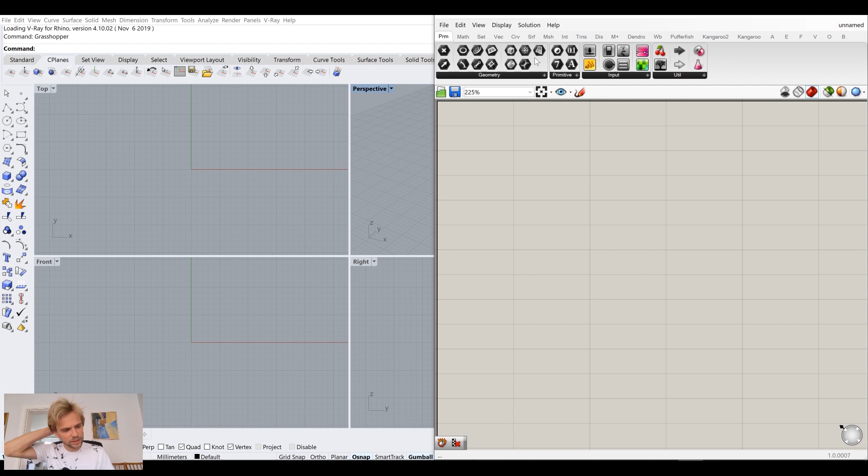So the way smocking works is basically you have a piece of fabric and you stitch some parts of it together to create this kind of a pattern. And actually, let me Google that for you. Smocking patterns. There we go. Images. Yeah, stuff like this, right? And it's not necessarily this pattern, but just this kind of a planar pattern.

But rather, I'm going to try and do something a little bit more three-dimensional. So we'll try and create a column out of it. And the person who's doing research, at least in the field of architecture, is Annie. There we go. She's working as I believe still a PhD candidate in LTH in Stockholm, and she's doing some really interesting stuff. So if you're interested to learn more about the subject, just Google her, find her papers, and you can read all about it.

But basically, we'll just try to do something really simple and really fast. So enough of that. Where do we begin? Well, let's first find a smocking pattern that we can use. I think this is from Annie as well. So she's using fabric as a formwork for concrete, and I think that's a brilliant idea. A smocked fabric to create these beautiful patterns on a concrete shell. Let's go with the middle one, right?

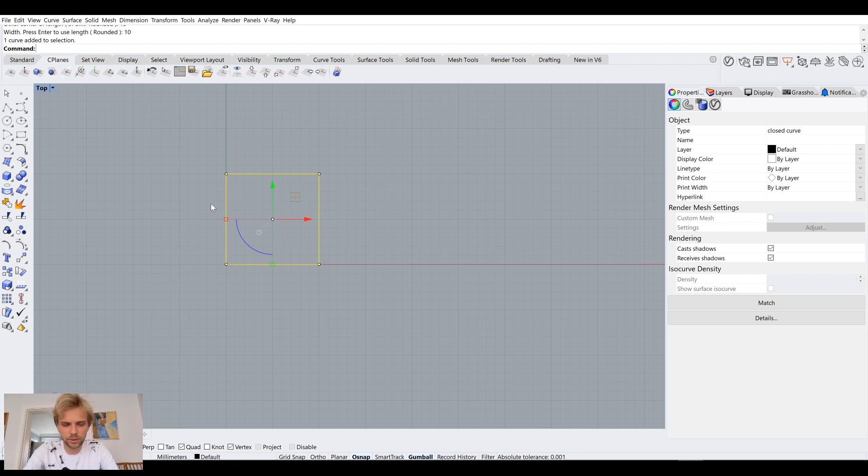I could use array, but for this I'll just copy. Why not? Copy. Let's do it like this. Copy. Great. So we have 8 rectangles, and I'll just call this layer pattern base, and I'll move all of those objects to that layer. And then what do we call this layer? Lines. I'll just call it lines, and I'll make it red. There we go.

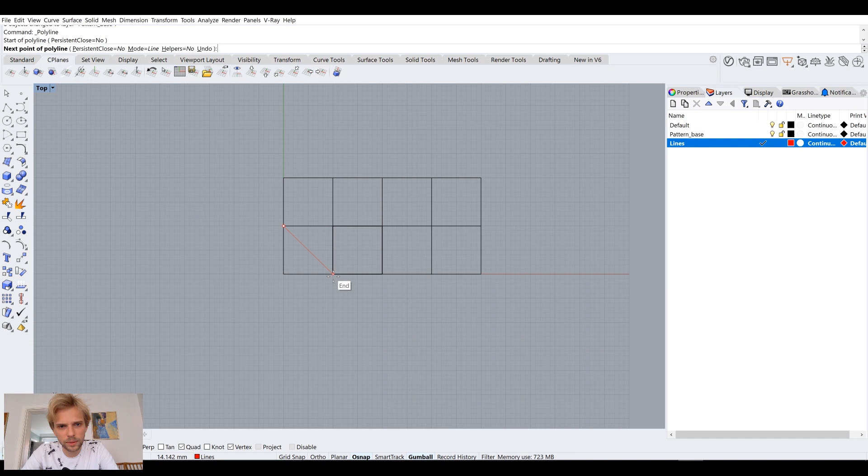And in this layer, we will draw these line segments here. Okay, so we have one going down here, and these can't be polylines, these need to be separate line segments. So stuff like that, and then we have this, and we have that. Okay, so we have this very simple pattern. And now it's time to convert it into a mesh and start messing around with it in Grasshopper.

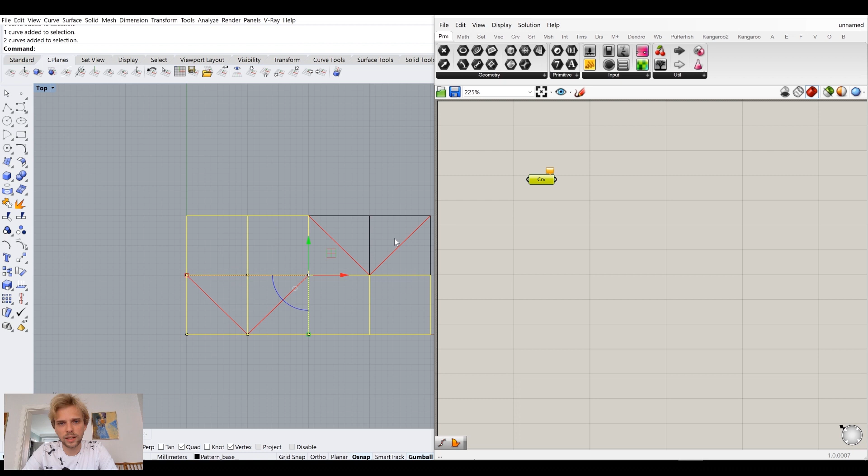Okay, so first things first, let me reference these rectangles into a curve component. So I'll select these 8 rectangles. I'm not selecting the lines, by the way. And I'll right click on the curve component and set multiple curves. There we go. Maybe I should hide them. Or no, it doesn't matter. And then we have these line segments. So I'll make another curve component, and I will select these line segments. Right click, set multiple curves.

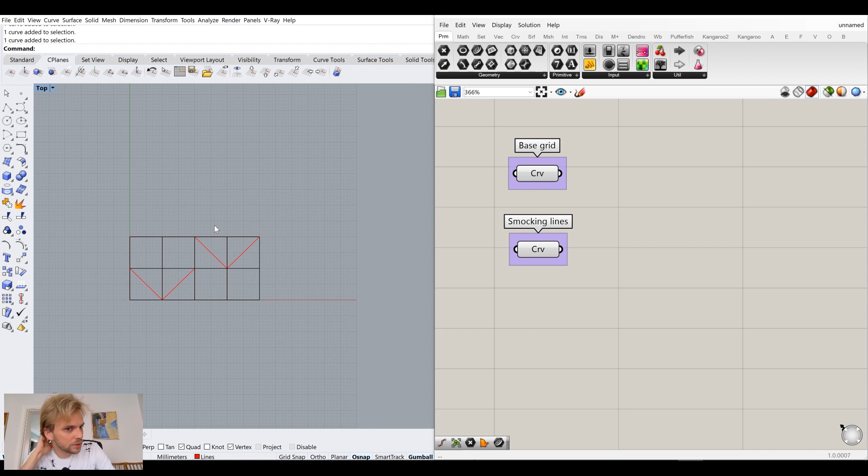Actually, I'll group these components separately, and I'll call this base grid, and I'll call this smocking lines. Okay, so now we need to be able to array this to any size that we want, right? So we want to be able to keep arraying this over and over. So how do we do that? Well, first things first, base grid here, I want to make this into a mesh.

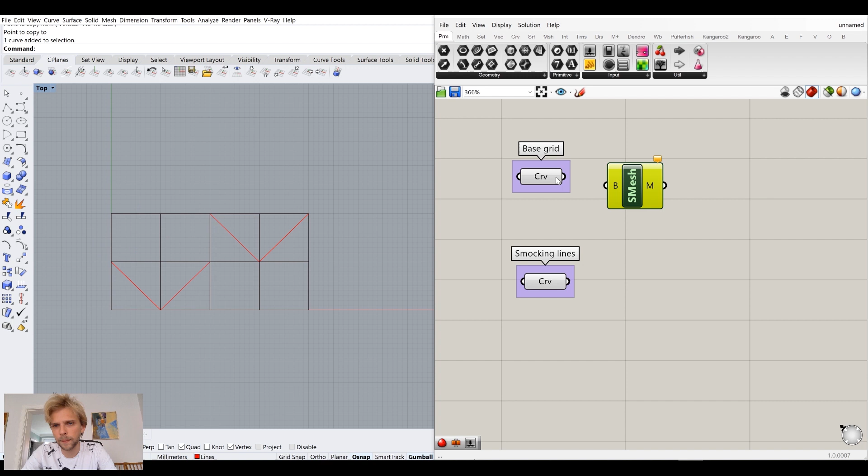Because I don't want to deal with curves anymore here in Grasshopper, I'll make this into a mesh. The easiest way to do it is by using a tool node called Simple Mesh, which will recognize every rectangle as a mesh face, so as a single mesh polygon.

So what we get here is 8 separate meshes, which have 4 vertices and 1 face. That's good. I will use those 8 meshes with Combine and Clean, which comes with Kangaroo 2. And now we have one single cleaned up mesh.

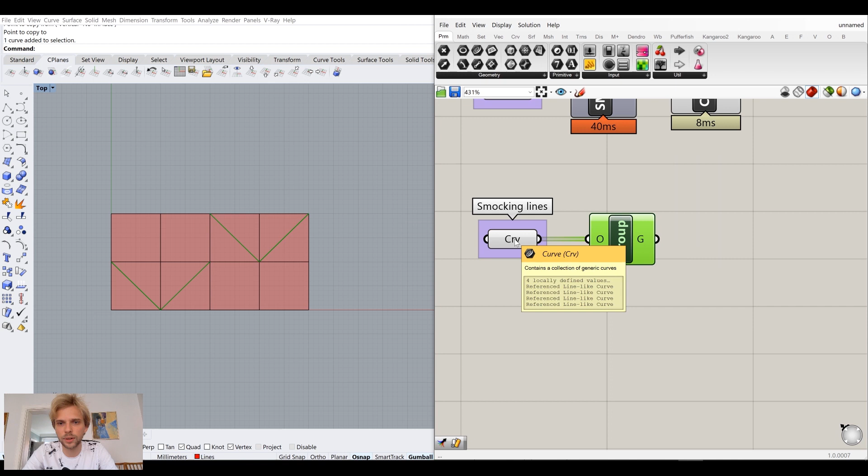Okay, that's good. And now for the curves, I want them to be arrayed as a group. So I'll just use a group component here, package these 4 curves into a single object, which is a group in Grasshopper. I will merge these 2 together into one list. So if I look at what this list has, it has a mesh, and it has a group with 4 objects. Easy. Those 4 objects are, of course, these curves here, these lines.

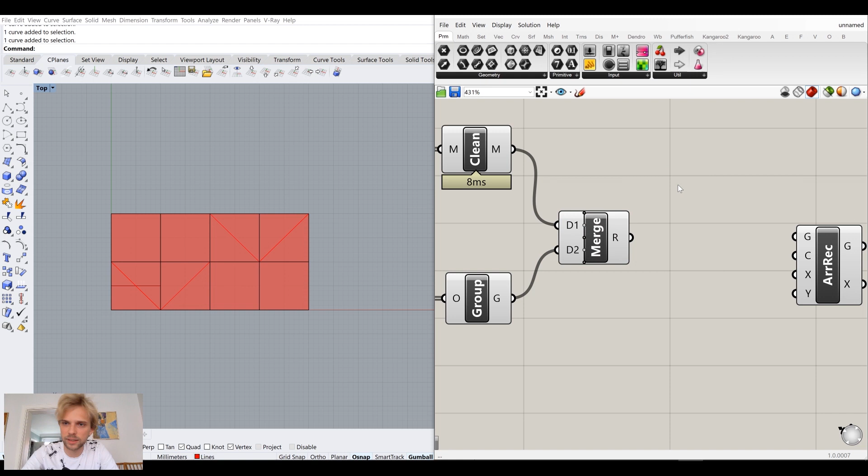Okay, so now it's time to array. Let's use just a regular rectangular array. And the geometry that we're arraying is going to be... no, sorry. Before we array, I want to group this again, package this even further. I'll group these 2, the mesh and group of 4 objects, into one single group.

So you can think of it as me just packaging everything into these boxes, just a big cluster of things here. Let me keep hiding things so that nothing is in the way. And now let's array. Okay, we have it arrayed, but the size, of course, is very bad.

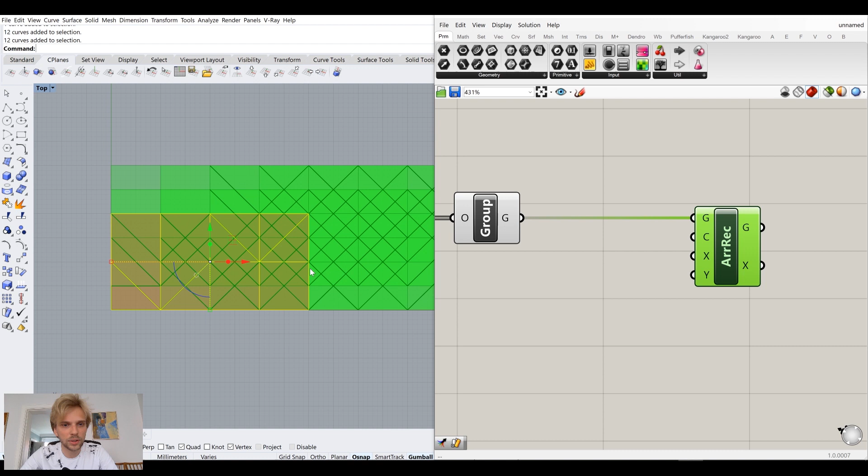The step size of the array is calculated through a rectangular cell size, so we need a rectangle that is like a boundary rectangle for all of our geometry that we have so far. To do that, let's just use bounding box. And what it gives us as an output is a flat box, meaning it's basically a rectangle.

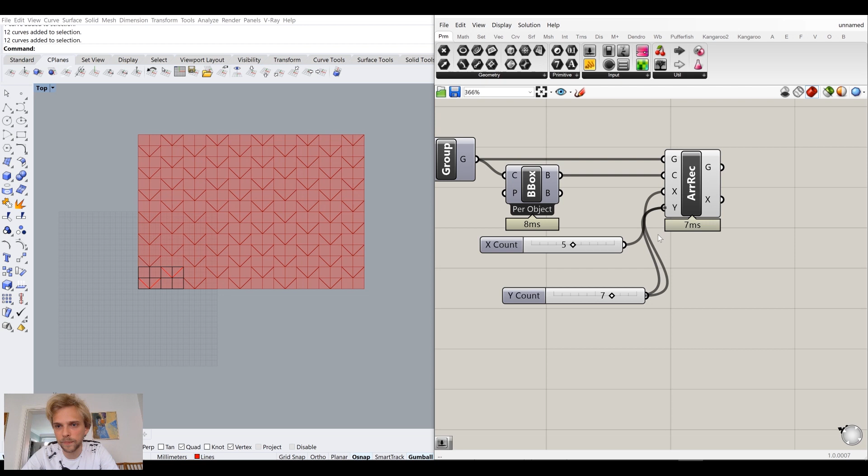So we can just use that as a cell, and now it's going to array properly. So now we have full control over how many times do we repeat this. I think I'm going to repeat it 5 times in X and 7 times in Y. Maybe let's go for 5 and 5, and then we'll switch it up if we don't like it. But basically here we can just control how many do we have.

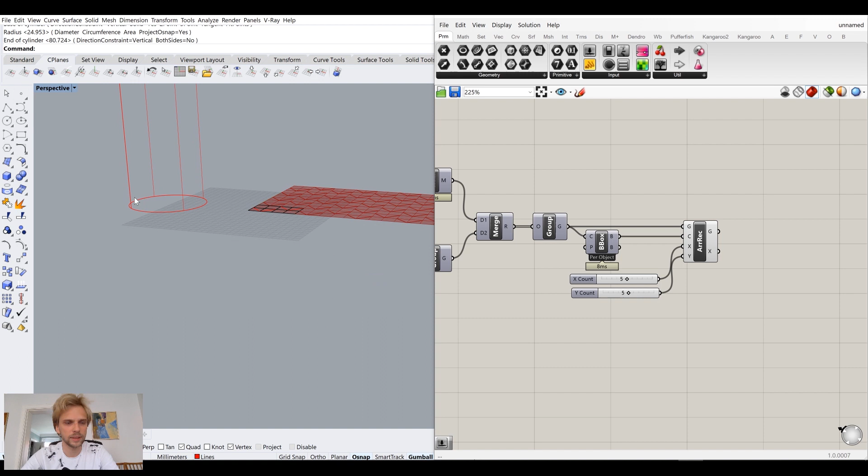Okay, so for now everything is flat, and as I mentioned before in the video, we want it to be a column, so it doesn't really work since it's flat. But what we can do is we can make a cylinder here. Let me just make it here, a cylinder, something like that. I'm not too concerned about the size of the cylinder. Actually, maybe I want it to be a little bit taller though.

Okay, and I will explode the cylinder and just get rid of the top and the bottom here, so it's basically just a tube. The nice thing about this is it's a single surface, meaning we can map this flat pattern onto the surface. So by using this technique, you can map the flat pattern on any kind of untrimmed single surface.

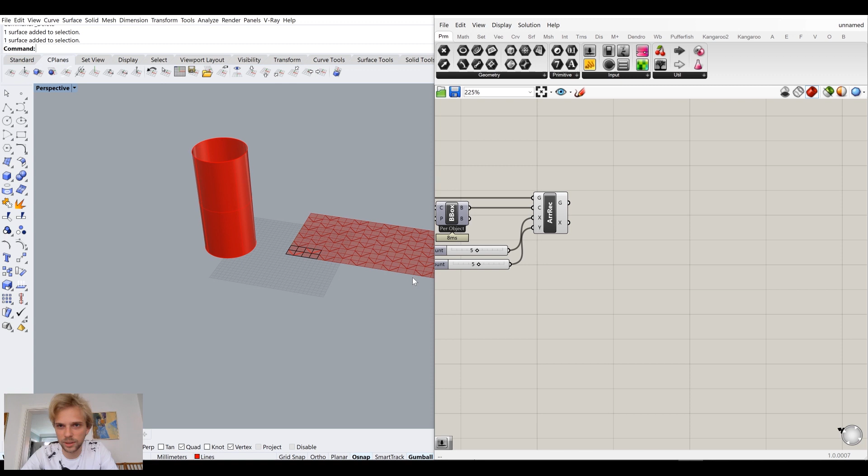But in this case, I'm just using a cylinder, we don't need to go all fancy with this. In Rhino, the tool that does that is called flow along surface, but in Grasshopper it's actually something else. It's under translation, or under transform, morph, and I believe it's called sporp. I don't know what's up with the name of it, but yeah, sporp. So it has a lot of inputs, but those are very easy to work with.

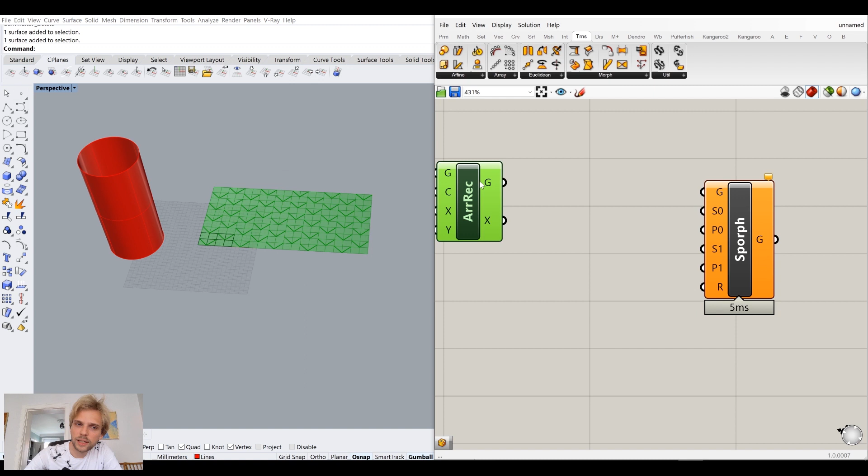So first input is base geometry, meaning what are you going to map. It's going to be all of our stuff here, so I'm just going to take all of our groups here, 25 groups in total, and those arrayed groups are going to be transferred from a flat piece to a cylindrical piece, or a flat surface to a cylindrical surface.

Then it asks me for base surface. Well, we don't have one yet, but as you can probably tell from this tool right here, we can just keep on using the bounding box tool. As long as it's flat, it's going to just give us a surface. So I'll say bounding box.

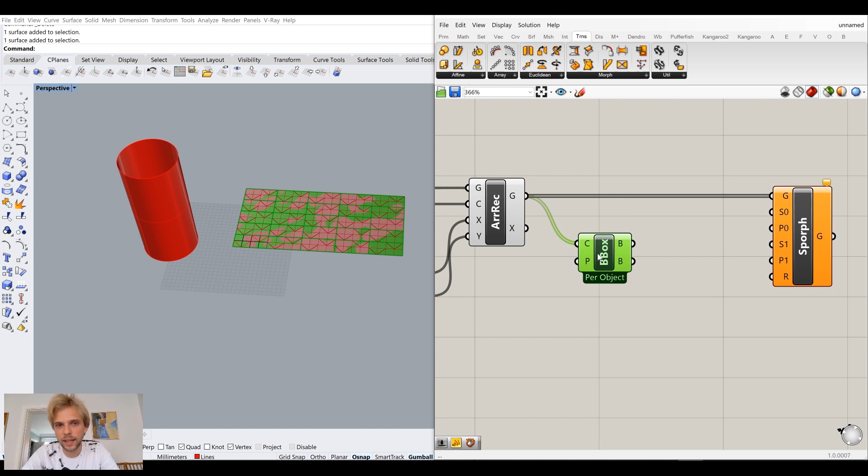Keep in mind that when you use a bounding box on this arrayed geometry, since it's per object, it's going to give you 25 bounding boxes. So I need to right click on the bounding box tool and choose union box, and then it's going to give me only one bounding box for all of them.

And it's a flat box, so I don't think it's going to work just like that. I'm not sure, but just to be sure that it works, we can use deconstruct brep, and it gives us one face, which is an untrimmed surface, and we just connect it to the S0 input here as our base surface.

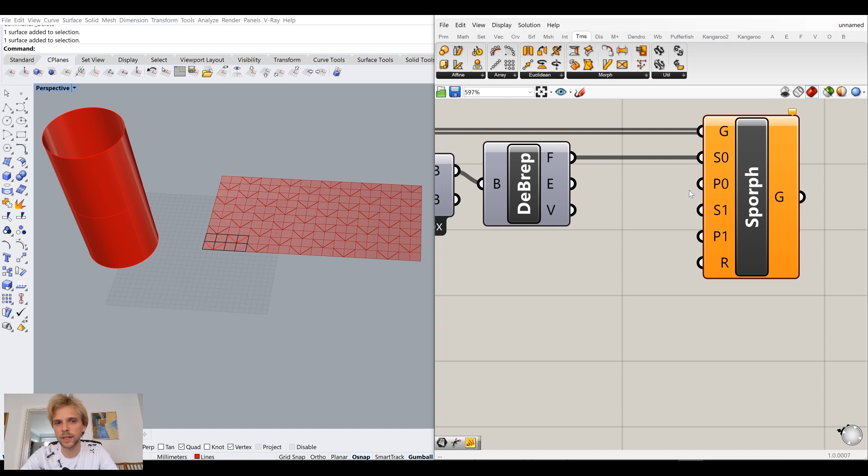Okay, so we're morphing this pattern from this surface, and then it asks us for UV parameter for orientation. Actually we don't really care about this, so we'll just use the first point on the surface, UV at 0,0, as well as UV at 0,0 for this cylindrical surface. I'll create a panel, double click on it, and type in 0,0. That means it's going to be the bottom left corner of this surface.

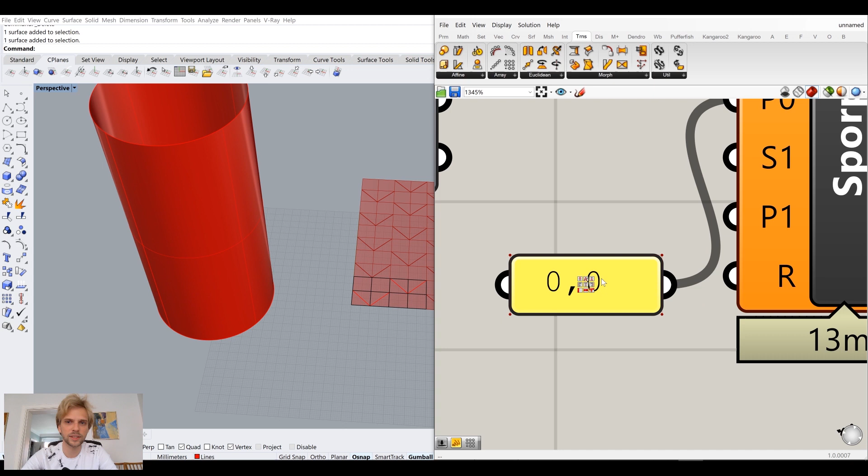By the way, with the panel, don't hit enter because that's just going to create another line of text. Just click outside once you're done. You don't want to have more than one line of text.

Okay, so we have the first part of this setup, and then the second part is the target surface. So that's going to be our cylinder. Let me reference it in as an SRF surface, set one surface, and let me hide the cylinder. And then UV parameter on target surface - I'll just reuse the same panel, why not.

Rigid geometry will not be deformed as it's transformed. I need to think about this. For now, let's keep it as false, but if this doesn't work, we will know what's the culprit.

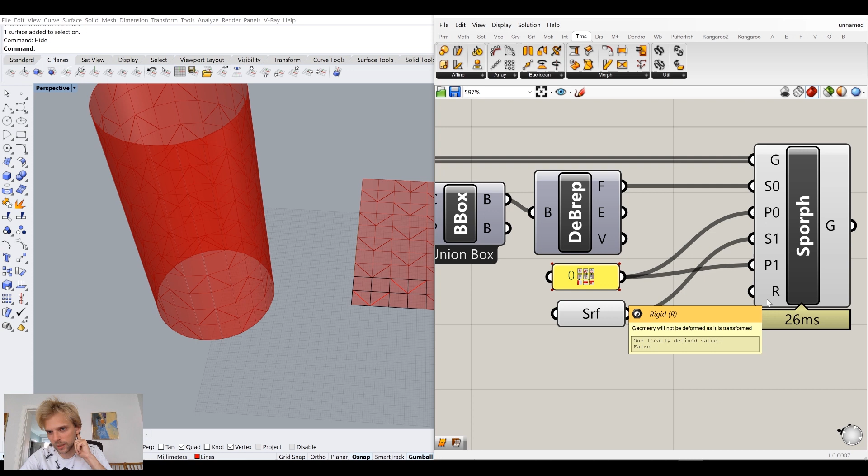Okay, so what do we have here? Well, we have a bunch of groups, right? So everything seems to be working correctly. Nice, and let me hide that so that it's not in the way, and now we'll just continue working with this guy.

So here we have 25 groups that are wrapping around this cylinder, and I will use ungroup on them. So I have ungrouped them, and now we have 25 branches. Let me right click on the output and choose simplify to kind of simplify the tree. So we have 25 branches from those 25 groups, and in each branch we have 2 elements.

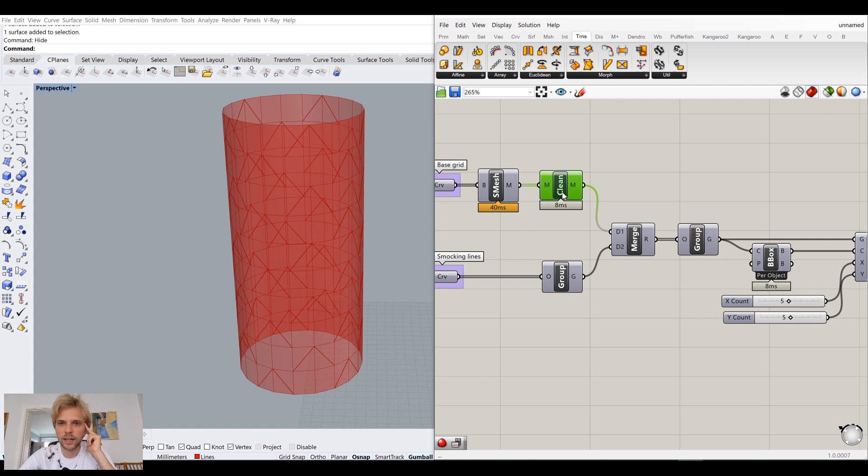And those elements are the meshes and the lines. So let me separate them by using explode tree, like that. We need to do one more thing.

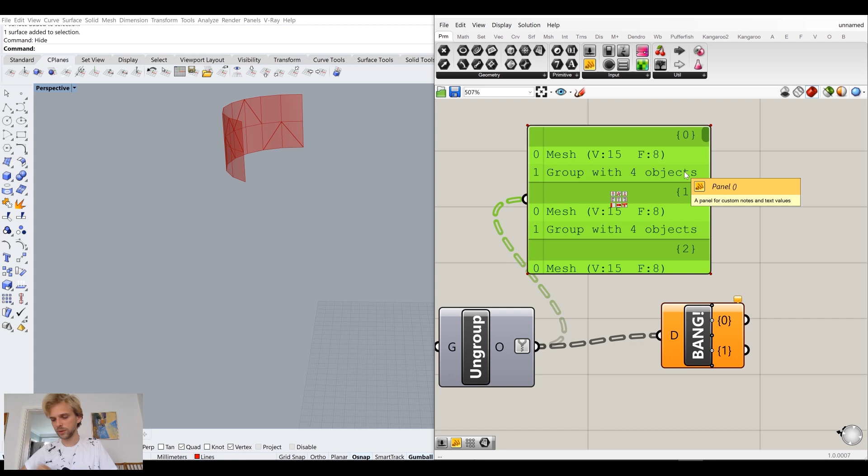So if I look at it with a panel, I can see I have 25 branches with always the first element being the mesh and the second element being the group of lines that are going to contract. That's good and all, but I want to separate all meshes and all groups into separate outputs.

So to do that, I can say flip matrix, and what this will do is take all of the meshes that are at index 0 in each branch, and group them all into a new branch. And then it's going to take all of the groups that are in index 1 in each branch, and group them into their own branch.

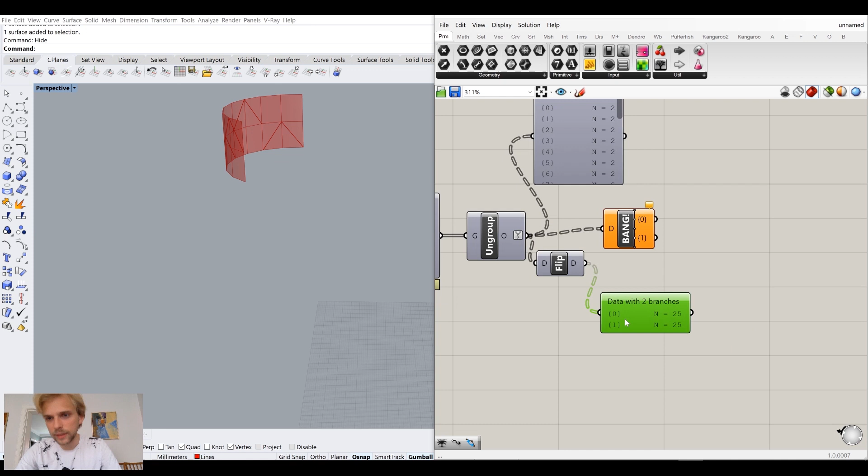So visually, I guess it's easier to show you. Visually we had a data tree with 25 branches and 2 elements in each branch. After flip matrix, we have 2 branches with 25 elements in each branch. So it kind of flipped the logic.

And now I can use explode - I can use bang right here. And now we have separated all of the meshes into one output and all of the groups of lines into another output.

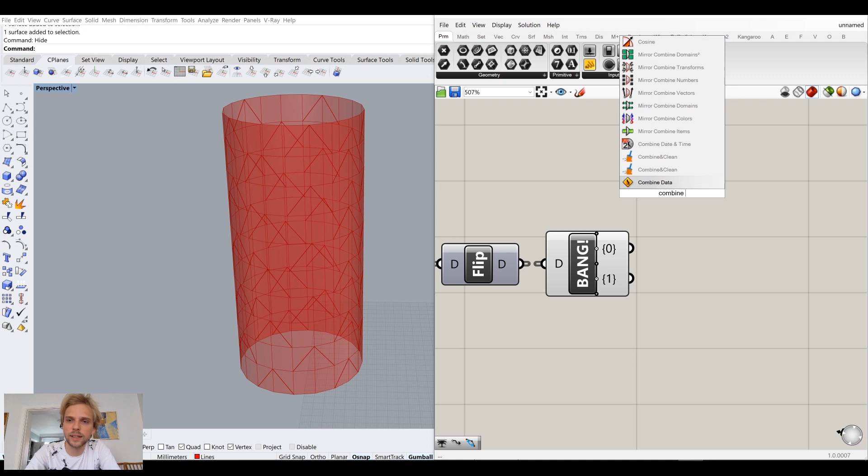All right, so now let's deal with the meshes first. I want to join them up, and I'll use combine and clean for this.

So all of the meshes are joined up now, and I need more resolution. I can't use Catmull-Clark subdivision for this, and let me explain why.

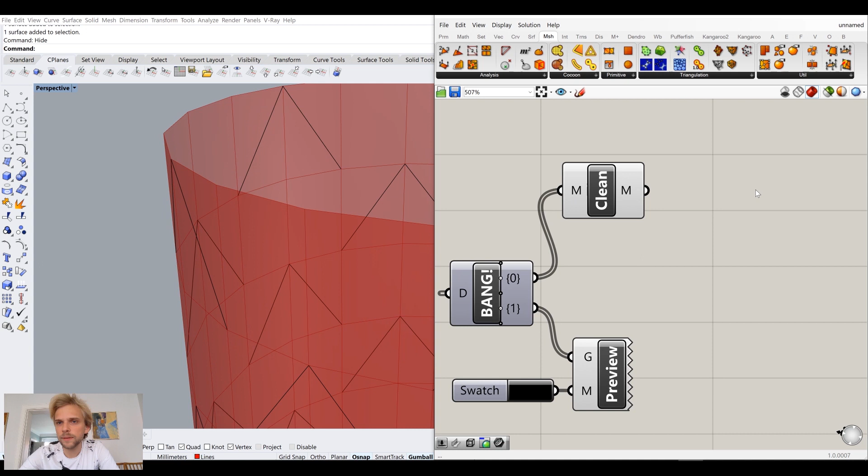Let me just set up a custom preview swatch, make it black, like so. Okay, so if I were to use Catmull-Clark subdivision with a level of 2, whatever, that doesn't matter, see how these lines disconnect from the mesh? That's because Catmull-Clark smooths it out.

Even if I use fixed setting, it doesn't matter. Only the top parts get fixed, but the inner parts still get smoothed out, meaning the mesh moves away from these lines that we have here. We can't have that, so Catmull-Clark is out of the question.

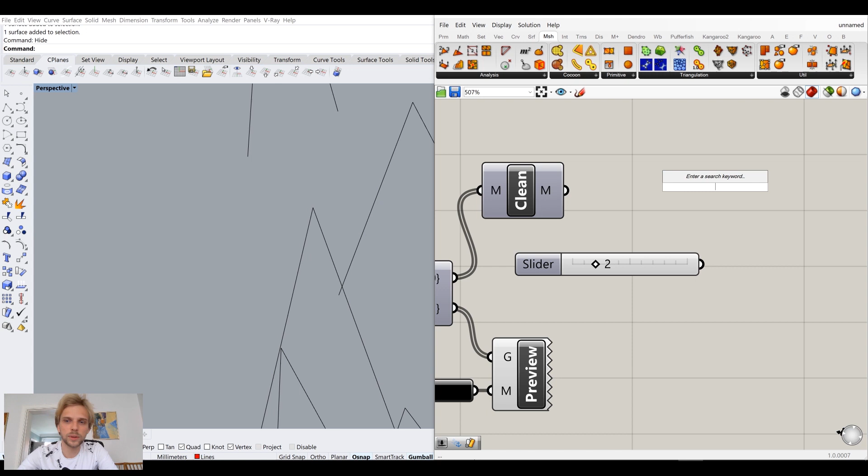Instead of Catmull-Clark, I will use constant quads subdivision. So here we have our clean mesh, and I'll just connect it to our split quads tool, and I'll use a level of 2 for it. Now you can see that all of these lines stay on the polygons, which is super for us.

Okay, we have that going. That's very nice, that's very good.

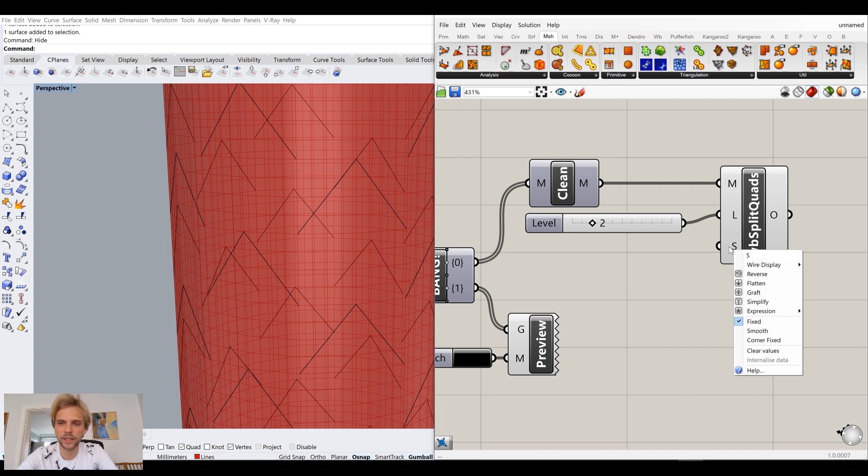Can I actually, just to be sure, choose fixed? So here I right click on the S input and choose fixed so that nothing moves, everything is as it is, we just have more polygons. This is important because the more polygons you have, the more precise the calculation is going to be, the simulation is going to be.

Okay, now it's time to actually start creating a simulation script. How do we simulate this? We'll use Kangaroo for this, of course. Always when working with Kangaroo, I go backwards, right? Usually you go from left to right, but in this case I go backwards because Kangaroo is always set up in the same way.

So I will create a solver, which will always have a toggle, you know, to turn it on or off, and it's always going to have a button to reset it, right?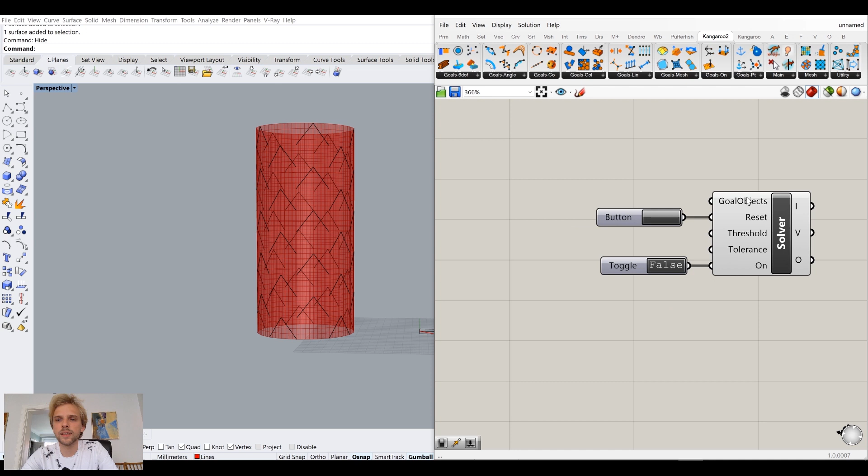And then for goal objects, I will say entwine. I will create a data tree where there's going to be only 2 inputs, 0,0 and 0,1. You can add or remove inputs by clicking on these. You zoom in and then you can click on these plus minus signs. Okay, so a data tree with 2 inputs is going to come in.

Why is it like that? That's because I will use goal show as my 0,0 input, and all other physics-based goals are going to be placed in here, plugged in here. And I will have definitely more than 1, so I'll use merge for all of them. There we go. So I'll merge a bunch of inputs here, and merge works the same way, you can keep adding inputs when you zoom in.

Okay, so since 2 data branches are going to come into the solver, 2 data branches are going to come out, right? So I'll use explode tree here, just like that. And I know that show, which is a goal that says give me the geometry, comes in at 0,0, meaning that after I explode the tree... why are you freaking out? Oh, that's because of this, doesn't matter.

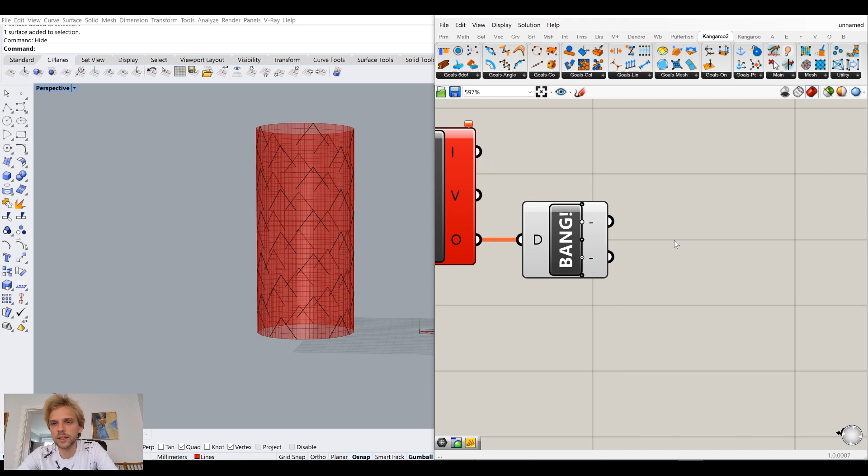So since show comes in first, right, the mesh is going to come out first. So the important part is going to be here, and let me just create a mesh container, just like that. And what do we do with it?

Yeah, for now, let's just make it pretty. So preview, custom preview, just like that. There we go. Okay, so this is my setup, and I should probably have it as a separate file and just keep copying it in, because this is always the same for any simulation that I do.

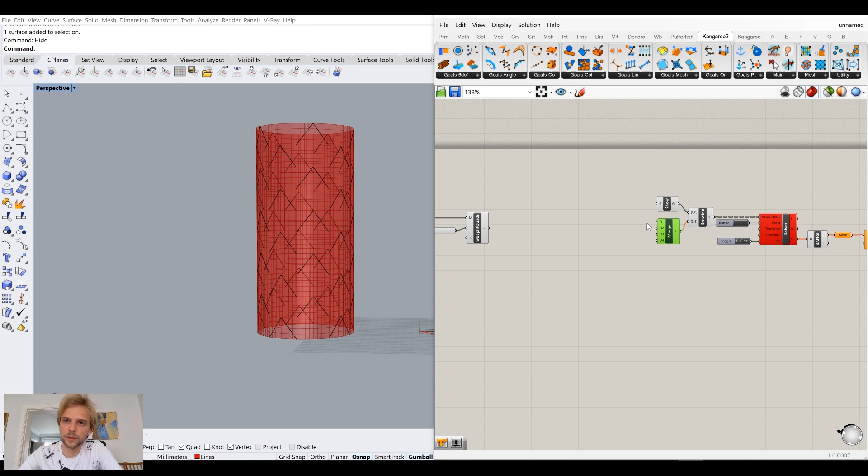So let's start dealing with goals, and there we are going to have a lot of them. So the first goal is show, which is just our mesh, and let me connect it to show, just like that. Now we have way too many things, so I will hide literally everything except for the two previews.

And now basically our simulation goes like this: you tell the solver to show you the mesh, it shows you the mesh, and that's it, right? So it's not a fun simulation for now.

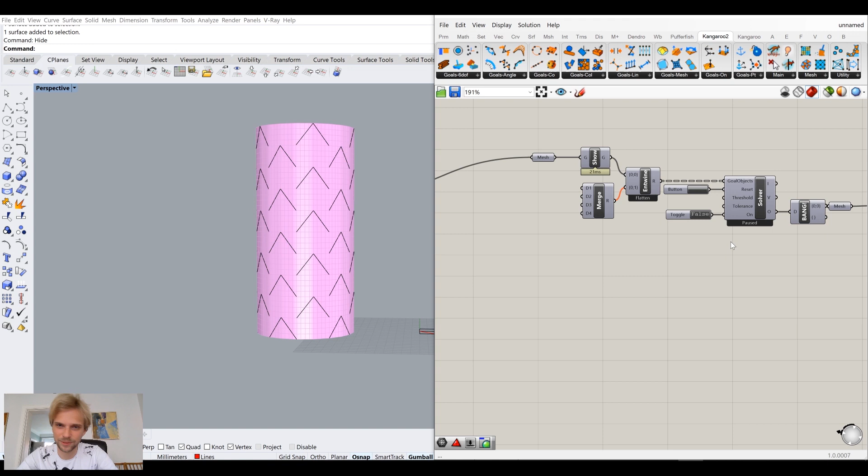All right, so now let's make it fun. Where do we start? Think of it this way: this pink mesh is basically like a tube of fabric, and you pour concrete into that tube, right? And then you will contract these edges, these lines, to create a pattern.

All right, so first things first, fabric cannot be infinitely stretchy, right? It needs to be able to withstand a certain amount of pressure and torsion.

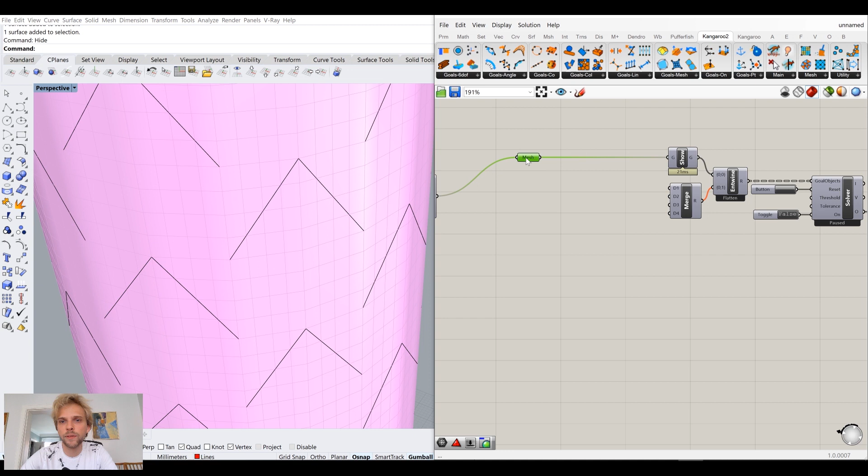So the first thing for this mesh that we have here, the first goal is going to be edge lengths, right? The mesh, all of these edges, they are going to try and keep their original length, meaning that the fabric will not be able to stretch freely or infinitely. So edge length asks us for three inputs: mesh, length factor, and strength.

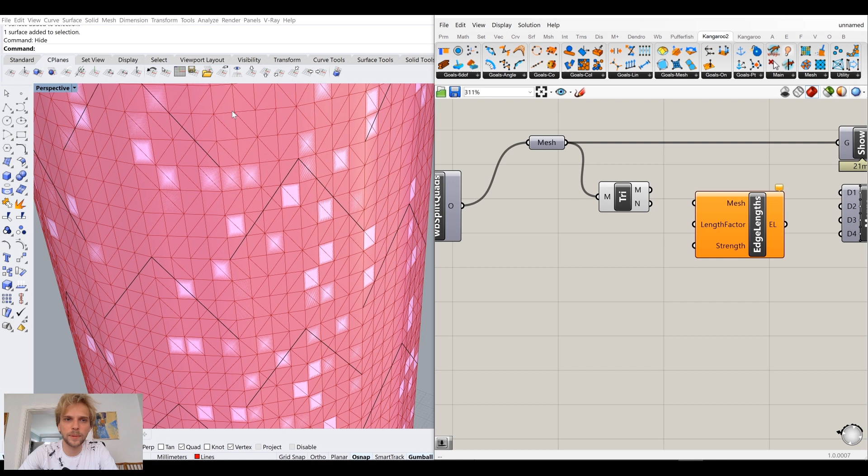Okay, so for the mesh, we could use this, but what I prefer to do is triangulate the mesh first to get more edges. And this is not a clean way of how to do it. There's actually a cleaner way, but don't worry about it. So this is a triangulated mesh right here. You can see that it converts every quad into two triangles. And then we just feed it into edge length. So all of these lines will try to keep their original length.

Okay. Length factor, by default, it's set to 1, meaning it tries to keep the original length, and that's perfect. Strength, it's set to 1. Maybe 1 is fine. We will see. It's hard to tell right now. So let's say edge length strength is 1. Okay. So I connected there. And now if I reset, and if I run the simulation, nothing happens.

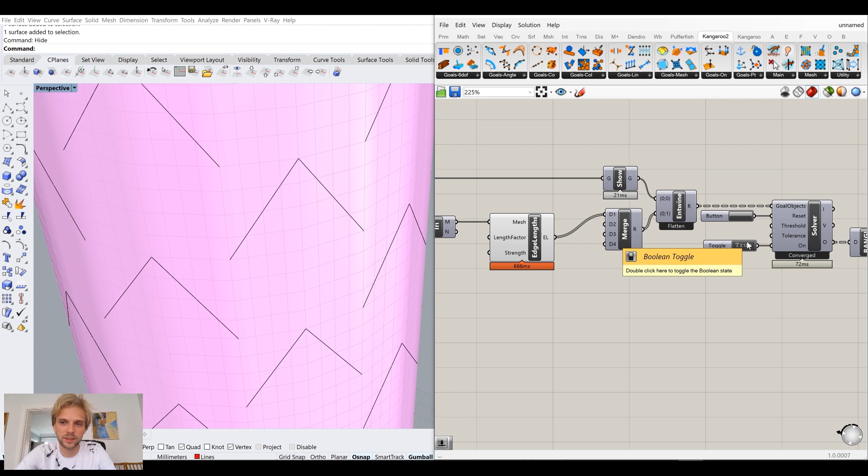That's because we basically have two goals. One is show, and let me move it here. One is show, and the other one is just stay as you are, right? So it just does that, and nothing happens. Okay, so now let me say stiff fabric, there we go, show mesh. So I'll keep naming the goals so that we don't get lost, because we will have quite a few.

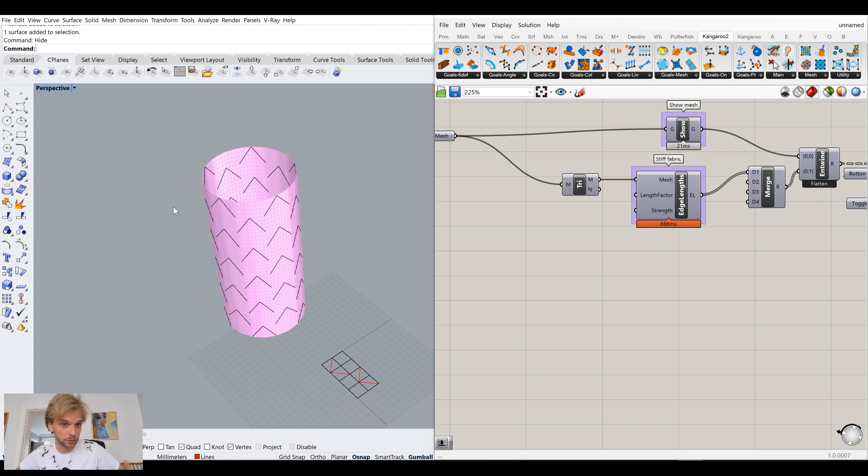Okay, so we have a piece of fabric here, and we're pouring concrete into this piece of fabric. How is it going to behave? Or rather, what kind of physical things are going to happen with it? Well, it's going to inflate, right? And it's going to inflate because there's going to be pressure involved. So pressure-wise, all of these polygons are going to try and move outwards, right?

So, okay, do we have a goal for that? Load, we could use load, but there should be, for a mesh, yeah, there we go, pressure, super. So we will use pressure, which asks us to give it a mesh, and we will use this triangular mesh here. And for pressure strength, I think when it's set to 1, it's just going to explode. Let's see. Reset, run, yep, just explodes. So it applies pressure to every polygon, and we have quite a few. So we can't have a pressure that is so high.

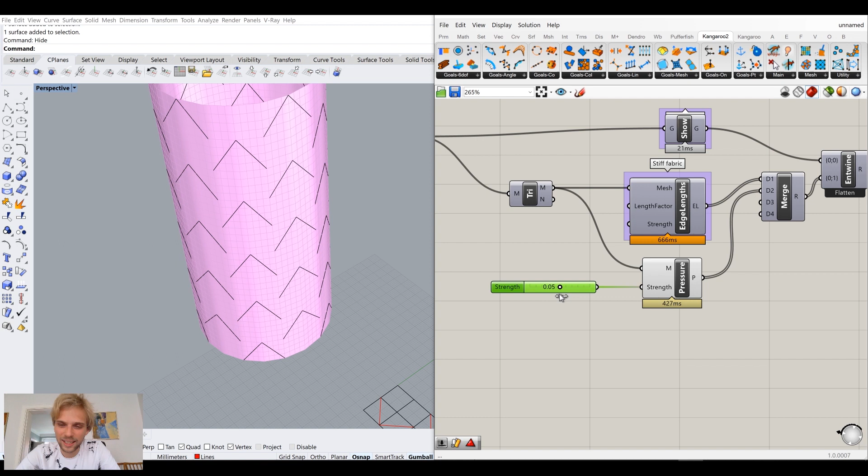Instead, I will say 0.04. I don't know, 0.05, 0.04. I just want a slider that's between 0 and 0.1, there we go. So 0.04 or 0.05, whatever. Reset, run, still inflating like crazy. Less, 0.02. Still inflating like crazy. Oh, wait. Now it's coming back. Still inflating. Okay. Even less.

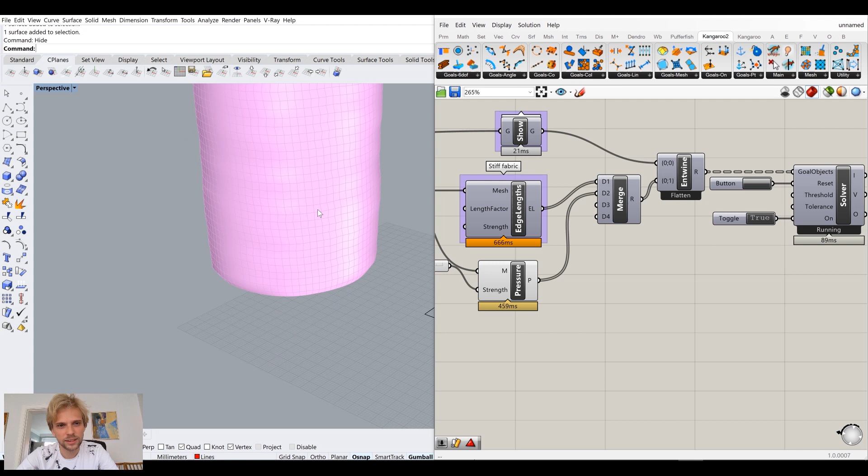Okay, 0.005. Reset. Okay. So this kind of works a little bit. So for this particular mesh, and by the way, the more polygons you have, the less strength you will need to use. So, apply pressure from concrete. Okay, that's good. So we have that done. We have 3 goals here that are done.

So now we need to start using those lines to actually create a pattern, right? So what do we have here? If I look at the output, it's a bunch of groups. So I need to ungroup this output, and we have a data tree, and we absolutely don't care about the data tree. So I'll flatten it out, and we have a bunch of lines. So my next goal is going to be, all of these lines need to contract.

Okay. So there is a goal that's called length line right here. It's not just a curve length. It actually makes the line change its length. Okay, sure, let's use that. So for this goal, it asks us for 3 inputs as well. First one is line. We just do that straight up. Let me hide that.

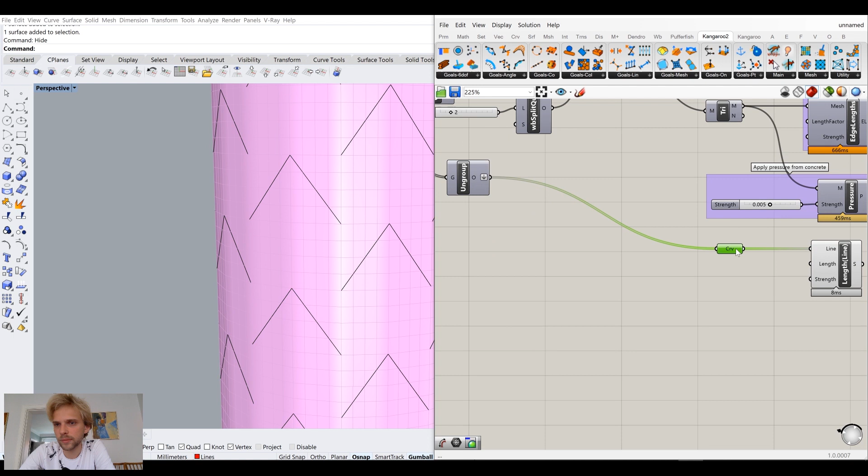Okay, and then we have length. So how long should the lines try and become? 0, right? Straight up 0. Just let me move the panel here. There we go, 0. And then strength, ooh, that's a tough one. Let's create a slider that goes from 0 until 10, and for now let's have it at 0 and just connect it like that.

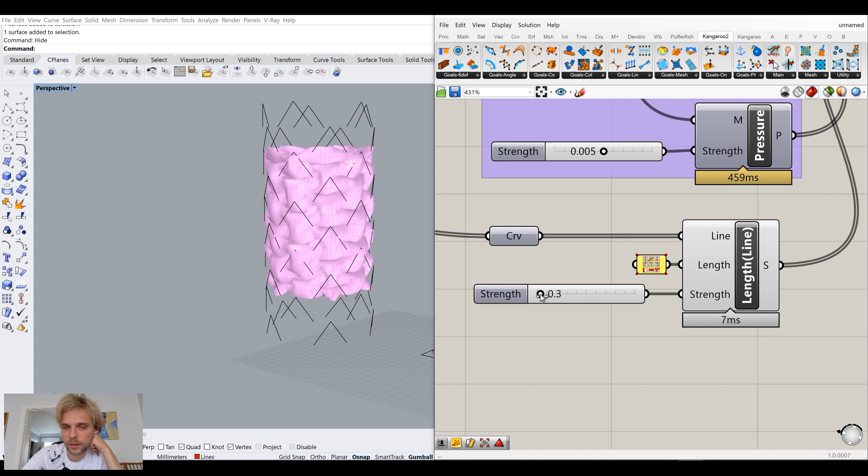Okay, reset. Let's run this. Okay, so it's doing its thing, it's inflating. And now let's increase the strength. Okay. It does its thing, and then it all falls apart, right? If I increase the strength even more, you know, completely destroyed. All right.

So it does work, but we still need more goals for this to work cleanly. So let me call this contract lines, or contract smocking lines. There we go.

Okay, what's next? So as it's contracting, stuff starts kind of folding into itself and like these loops of fabric start forming, and everything kind of collapses onto itself. So we need collisions. Unfortunately, we do need collisions for this, and I say unfortunately because calculation wise it becomes quite slow.

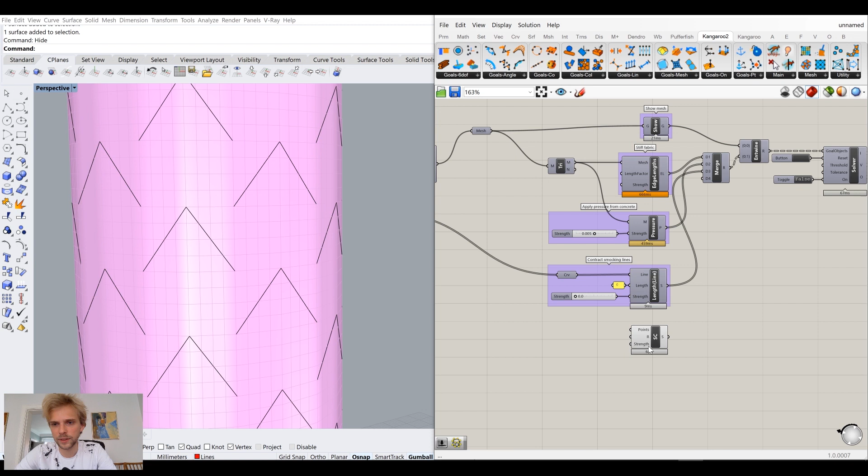So for this I will use sphere collide, which asks me to give it points, and I will give it points from this mesh right here, or from the triangulated mesh, doesn't really matter. I'll use this original mesh right here, and I'll say WBV, Weaverbird's vertices component, or you can just go to Weaverbird, extract Weaverbird's vertices component right here. Okay, so I'll connect mesh to this vertices component. It gives me all of the points, and I'll say that those points need to go in here.

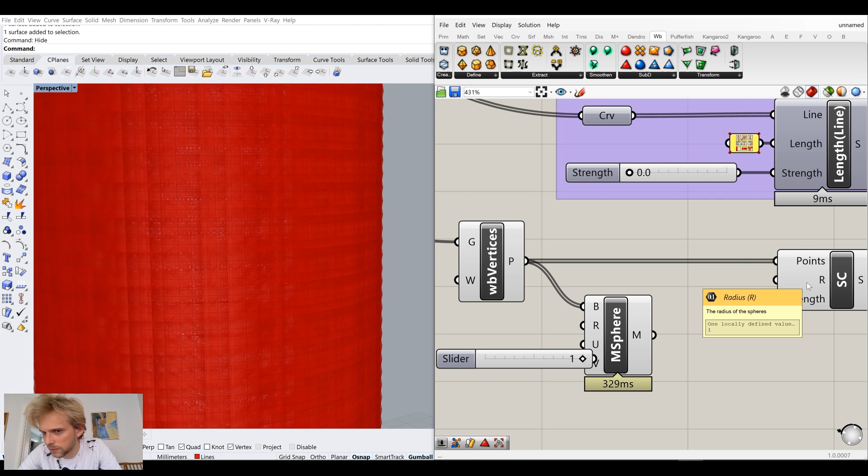Okay. So think of it this way, the way collisions work is it creates a mesh sphere around every point, and definitely not that big. I believe the radius by default is set to 1. Yes, it is. So it creates a sphere around each point, and those spheres will bounce off from each other as the simulation runs. So for now, 1 actually seems to be a pretty decent size, but we want it to be automated. If we change the mesh, we want it to automatically change its dimensions. So how do we do that?

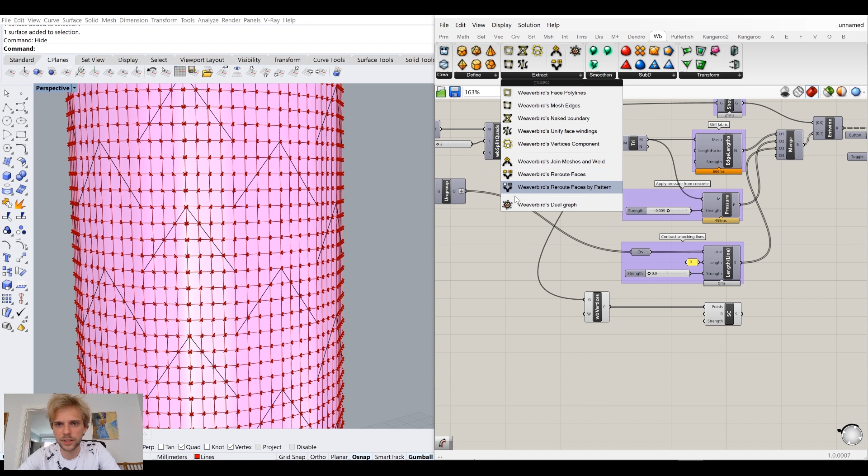Well, from this mesh, I will get its edges as well. So Weaverbird's mesh edges. Extract Weaverbird's mesh edges. So I extract the edges from this mesh. And let me move them somewhere here. And I will say, okay, what's the length of these edges, right? So it gives me a bunch of numbers. And I'll say, no, just give me an average. Average length. Okay, so it gives me an average length of 2.9, and 2.9 is just an average length.

So let's say we get the edge length of this. We need the radius of the sphere to be definitely less than half, so that those don't start hitting each other immediately. So I will take this number and I will divide it by 3, just like that. So now the sphere will reach only 1/3 of the line, but that should be definitely good enough.

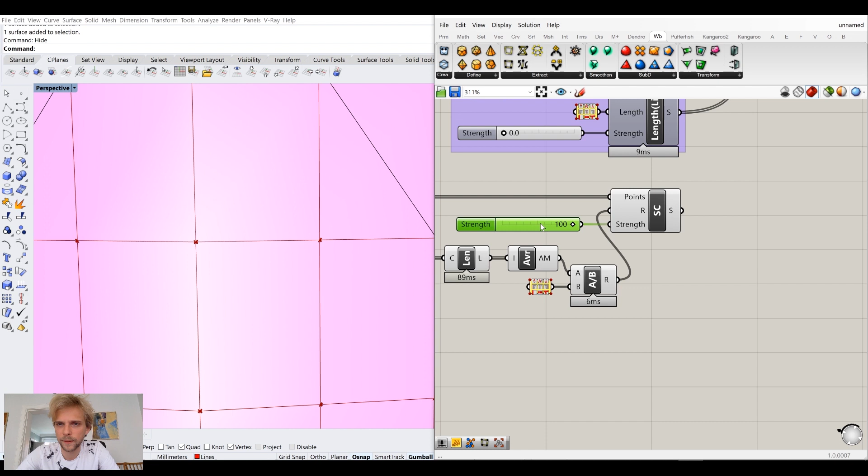And for strength, this needs to be pretty intense. Collisions are always pretty strong in the simulation. So I'll use strength of 100, like that. Let me group it, and let me call this collisions. I don't know if that's how you write collisions, but that's how I write collisions. Okay, so we have collisions here.

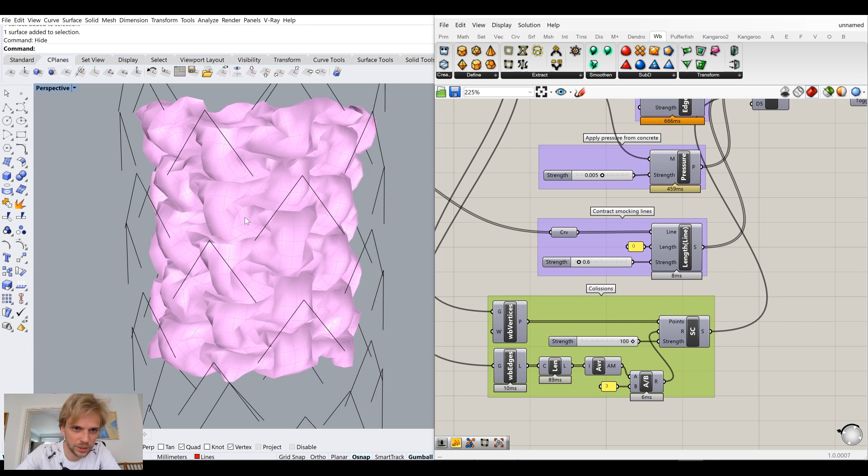Let's check it out. Run. It inflates. And now let's increase the strength. It contracts, but now it's a bit better, right? It's still kind of wishy-washy, but it's definitely better. And actually, let me make it even better. It's still low resolution here, and I do want it to stay low resolution. Actually, what if I increase the level of subdivisions here? No, for now, let's keep it low res.

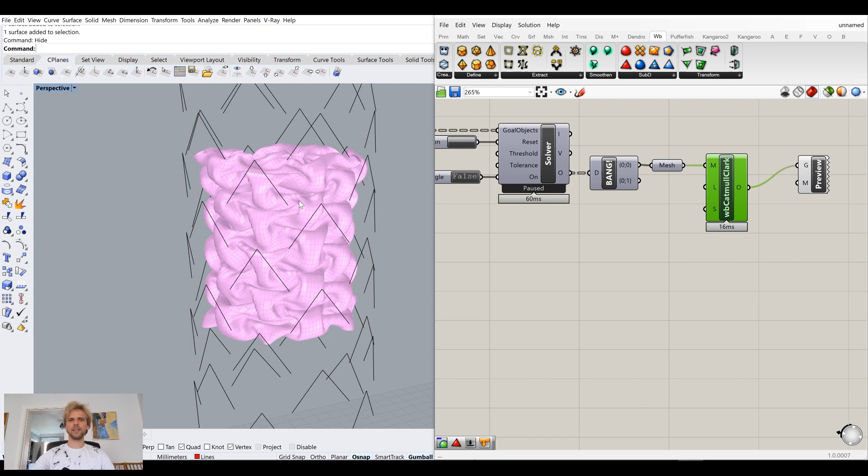But here, I can actually increase the resolution by just using Catmull-Clark subdivision on it. Just like that. Catmull-Clark subdivision will subdivide the form even further, and we end up with something like this. Whew, getting there. Definitely far from being a column, because it contracts way too much, but we're getting there. So let me reset, and let's see what else we can do.

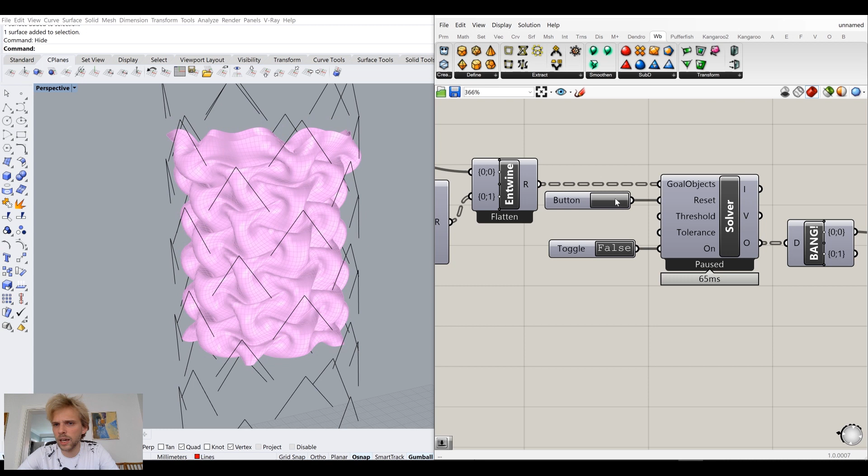Well, first of all, I want to use smooth. So smooth, the iron icon. And I want to smooth out this initial mesh before triangulation, this original mesh. And I will use a smoothing strength of 1, sure. So this just helps it be a bit smoother. Shouldn't change it too much, but let's see. Yeah, you can see now it's a bit smoother as it's contracting. Okay. Smooth it up. Okay.

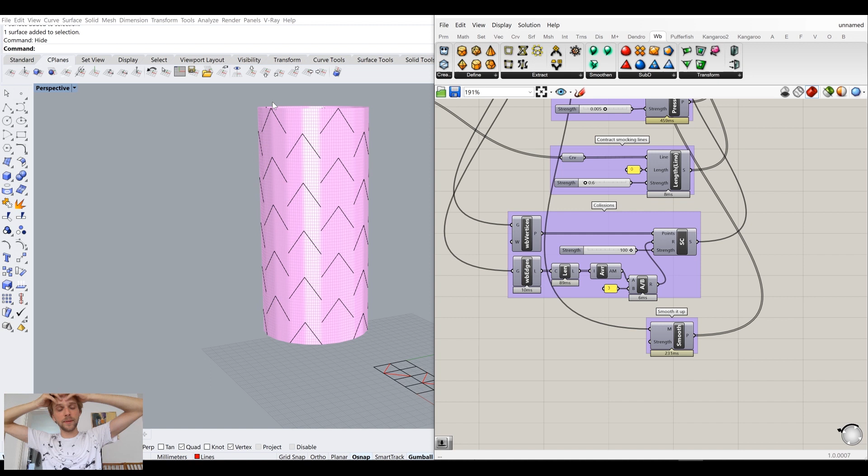That's so many goals. Okay, last part, I promise, or rather last goal, is going to be not letting it leave the bottom, and also the top. Let's say we have the top of this fabric, right? We would have a bracing system for the top so that it stays flat. And then we would say, okay, now just slowly move down, but not too much, while the bottom would probably be completely locked in place, right?

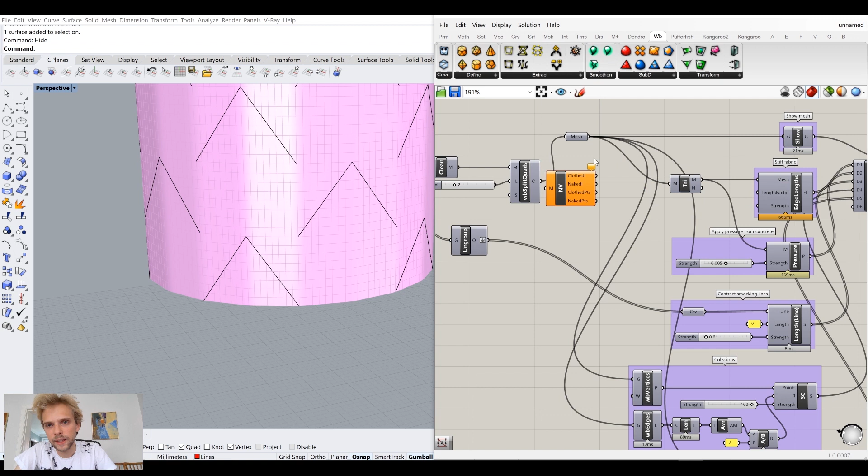Yeah, so let's do this. We have our mesh here, so I will extract all of the naked vertices of this mesh, NV, naked vertices. It shows all of the vertices, but I will only take out naked points, which are in the bottom and in the top, right? Those are points around openings. And I need to separate them into the top portion and the bottom portion, because I will treat them a little bit differently.

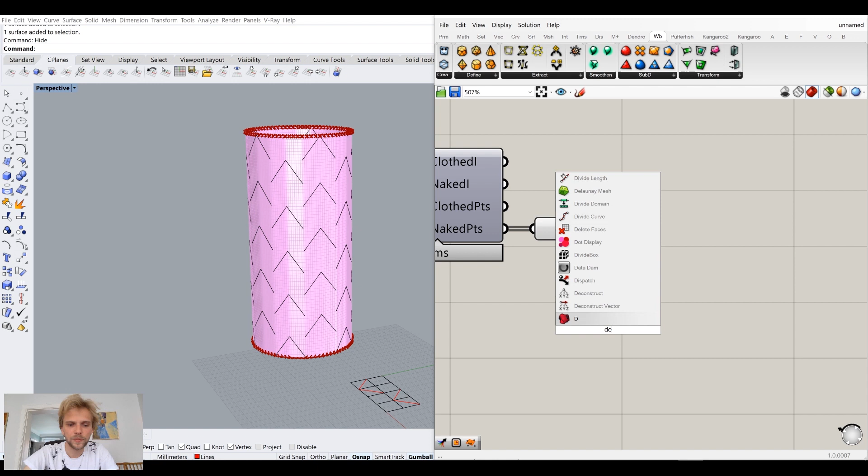So let's see these points. How are they different, the top group and the bottom group? Well, the top group is higher, right? So I can deconstruct those points into their XYZ coordinates, and I can say, okay, what's the average Z coordinate? 67. So it's somewhere in the middle, in between these two groups. And I'll ask, are these numbers larger than the average? Then we have a bunch of true and false answers. It's above or it's below.

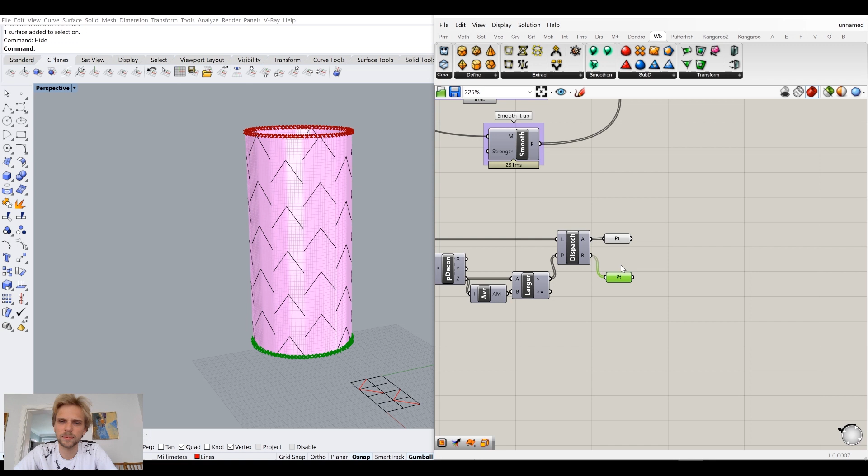And I can use those answers as a dispatch pattern for dispatching this list into two separate lists, A and B. A output are all of the points that are above, and B output are all of the points that are below. Super. Okay, let me make it more compact. There we go. Now we need to think about how we treat them. These are in the top, so let's start with the top.

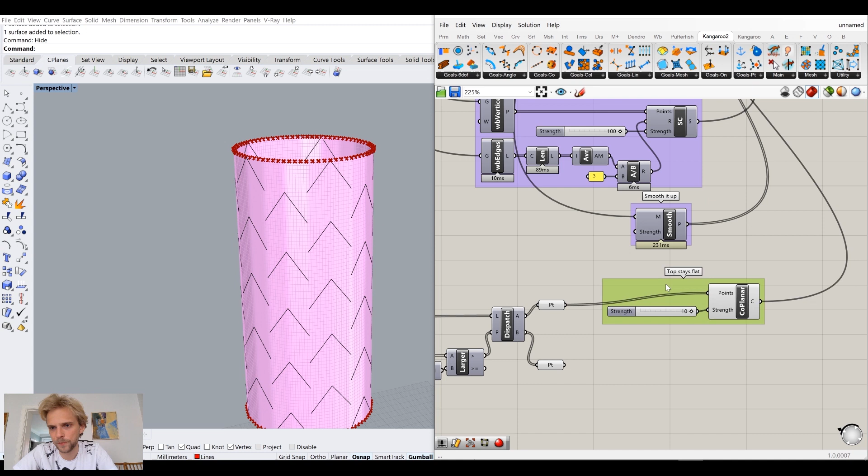First of all, I want these guys to stay coplanar, meaning they need to stay in the same plane. In Kangaroo, it's under goals, coplanar. So these points with a strength of, what's the default? That's 1. No, we need it to be pretty strong. Let's go for 10. So instead of 1, I'll use a strength of 10. That's going to be one more goal. Let's move this back here and call this top stays flat.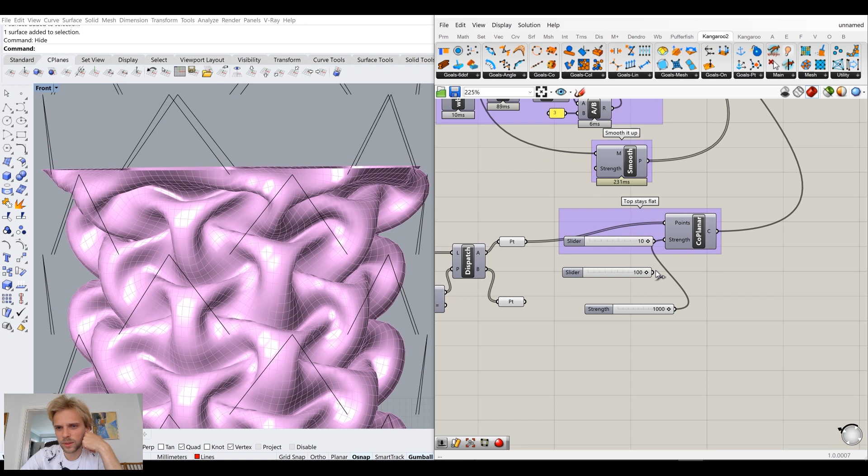Reset, run. They don't give a shit, do they? What if strength 100? Strength 1,000. Why do you not care? Ah, wait. No, with 1,000 they stay flat. Front view. There we go, these guys are flat. Nice. Will it work with 100? With 10? With 10 it starts going all over the place. Yeah, with 10 it messes up. So for now let's use 1,000. If it works, it works.

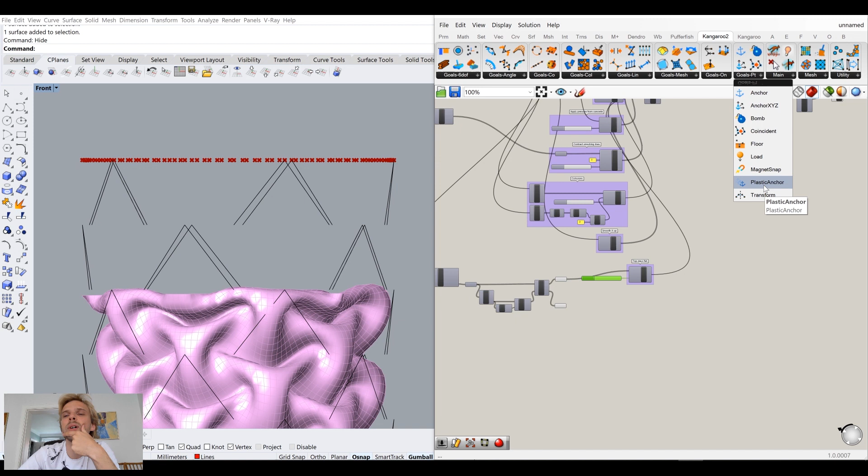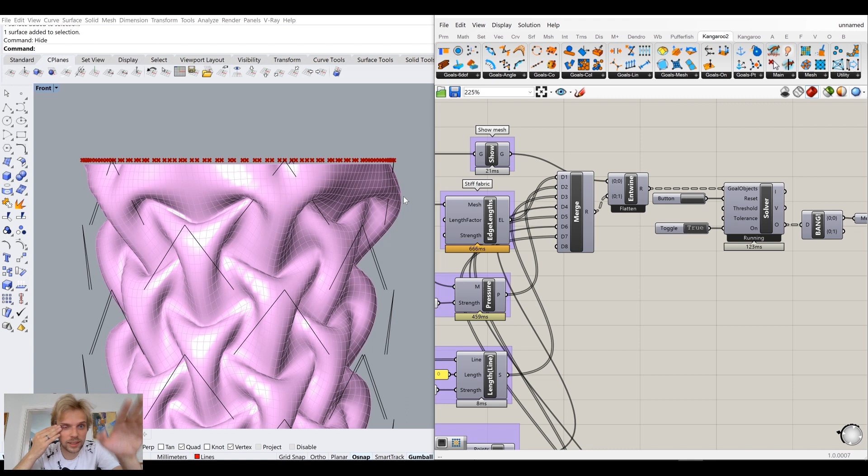And then I want these guys in the top to be anchored, but not too much. How do we do that? I believe there's a plastic anchor. I don't know how it works though, let's figure it out. Plastic anchor for these points as well, limit distance at which target point starts to slide. Strength 1. Reset false. Let's see if it helps. Reset. Oh boy, yeah. Nice. It slid a little bit and then stopped. Getting there.

And now for the bottom part. The bottom part will be nailed down, but I don't want to just use these bottom points as anchors. I want to let them move around freely on an X and Y plane, but they can't move up or down. I know it's not that realistic, but whatever. We don't care. So, what?

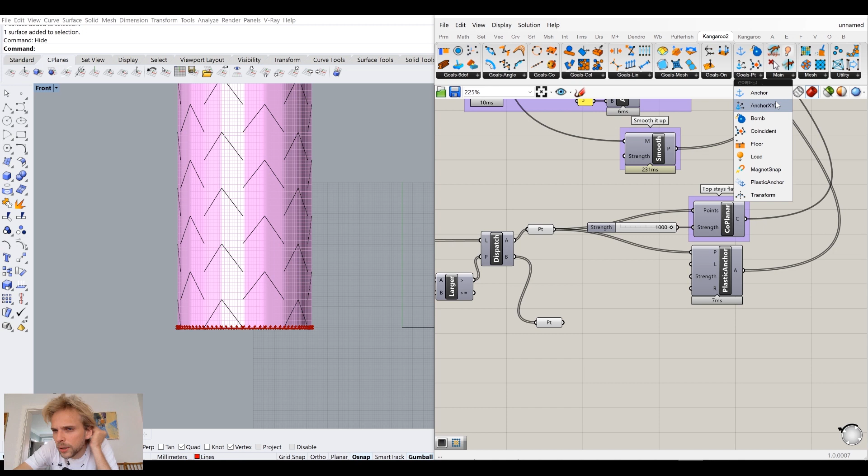Goals point, anchor XYZ. Is this the guy that we want? Point, yes, super. Okay, so we anchor down these bottom points, but it's false for X, false for Y, but true for Z. So we only anchor them in the Z direction. So they can't move up or down, but they can move left to right and back and forward. And the strength is 1000, that's fine. I'll just connect that to the 8 input. And I believe that's enough of goals for today.

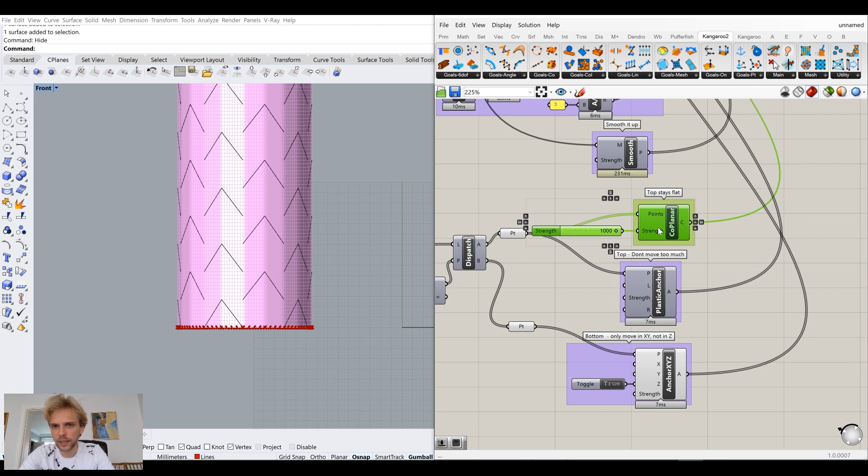Plastic anchor, let's just call it: top, don't move too much. And anchor XYZ, bottom: only move in XY, not in Z. Okay. So we have that, we have that. Whew, that's a lot of goals right there. But what can you do? Moment of truth, I guess.

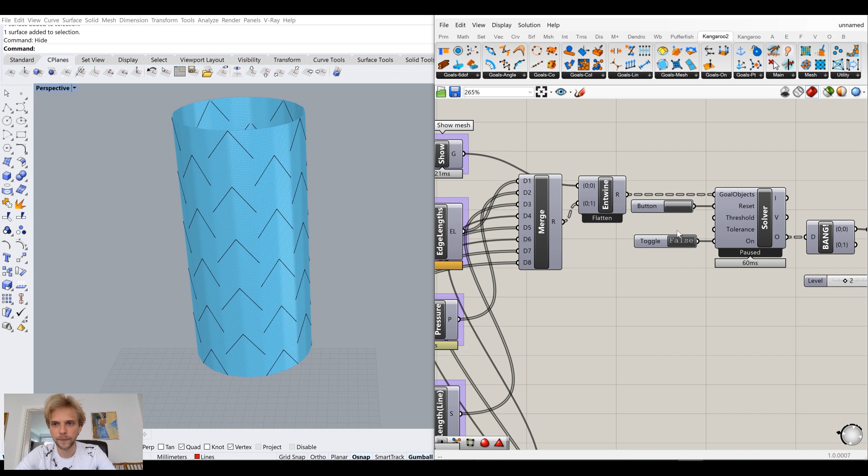Let's go for perspective view. Let's make this nice. Gray is definitely not the nice one. Something like that. Let's do level 2 for Catmull-Clark subdivision, not level 1, so that it's even nicer. Reset, run. All right, there it is. There it is. We have a working script.

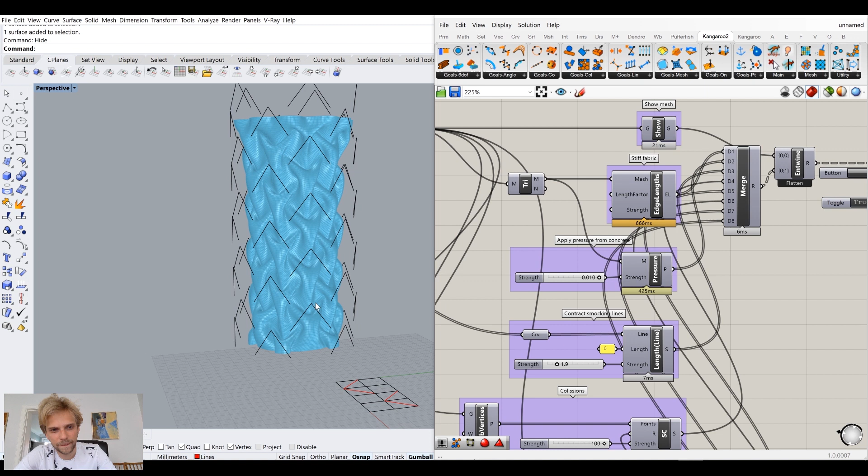And let's say I increase the strength. So it does that. Let's say I increase the pressure. So it does that. And now actually, the anchoring in the top stopped it. That's nice. Okay, we have it going. Nice. Then you can just bake it out. Show a default layer.

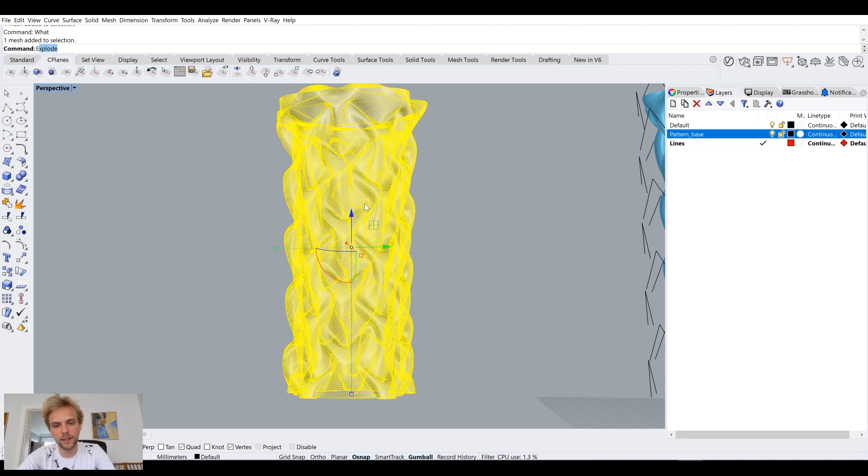And you have yourself, can I use fill mesh holes? Yes, I can. 3D printable. Let's check. Closed polygon mesh. Super. You can print this out and have it as, I don't know, a column or a table leg, whatever thing. Where's my display? Mesh wires, turn that one off. I have absolutely no complaints about this mesh right here. No need to improve it any further.

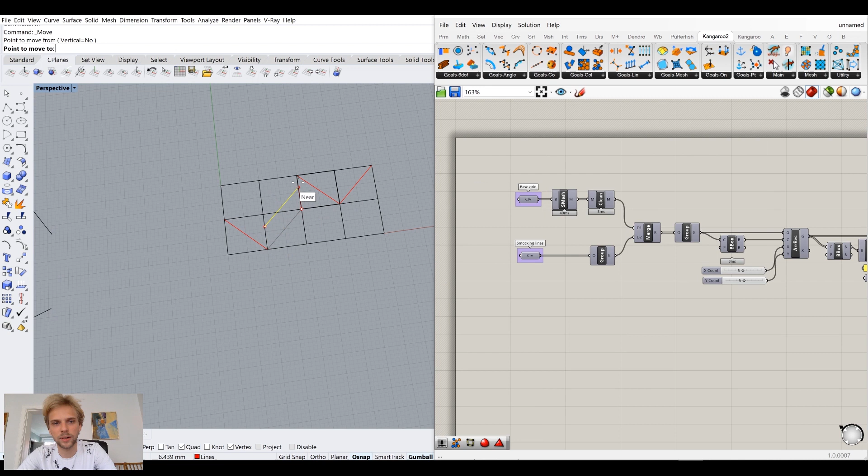So things that you are able to change, of course, the pattern. You can mess around with the pattern as you please. So now I've just moved the line, and also of course you can increase and decrease. You can add any pattern you want. So I just moved the line, and let's reset, and now this is with a different smocking pattern. This one is also kind of cool. Anyway, that's that. Let me move it back.

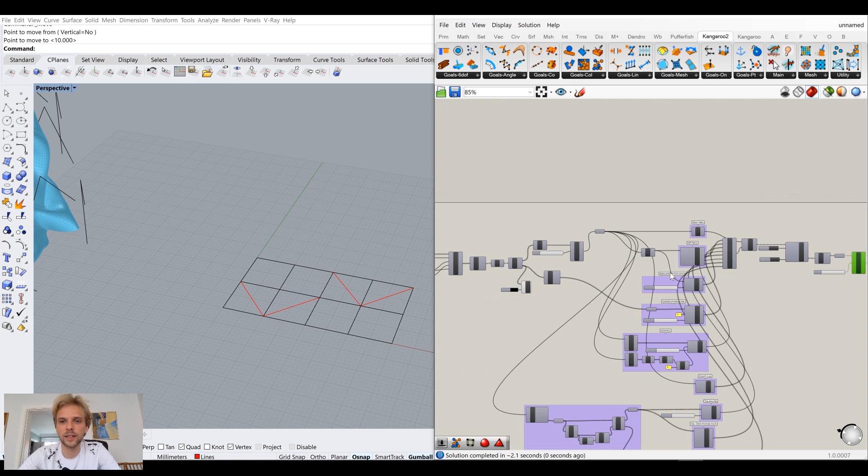What else can you do? You can, of course, show selected. You can change the cylinder, right? You can kind of do this kind of stuff with it. And then reset, run, still works. Everything's fine, neat and dandy. I believe it's still going to kind of converge to a cylinder. It's still going to try and find that kind of resting position. So it's going to try and stay as a cylinder.

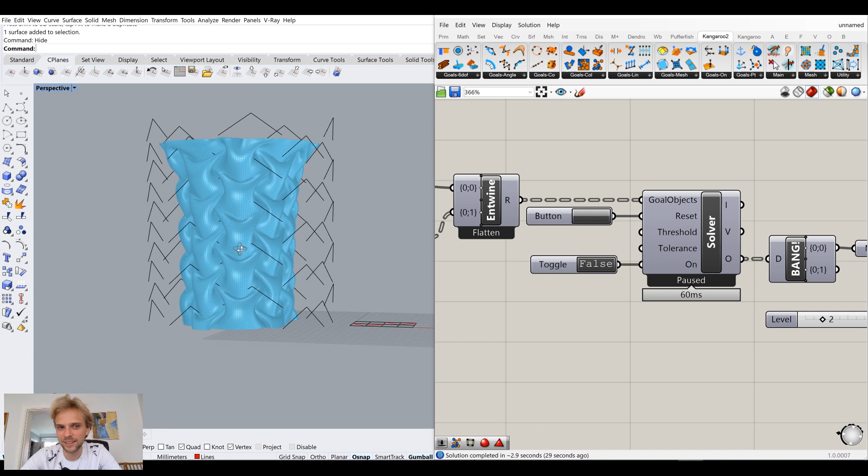Then what else can you do? Reset. You can change the resolution, right? 7. Just give it some time. 7 means more of these lines here. You can change the initial resolution of the split quads, meaning that you can run the simulation with more polygons if you have a better computer than I do, and it's going to run nicer. So for now, let me reset and run this. Looks nice. Okay, and I believe we are done. Nothing else to do here.

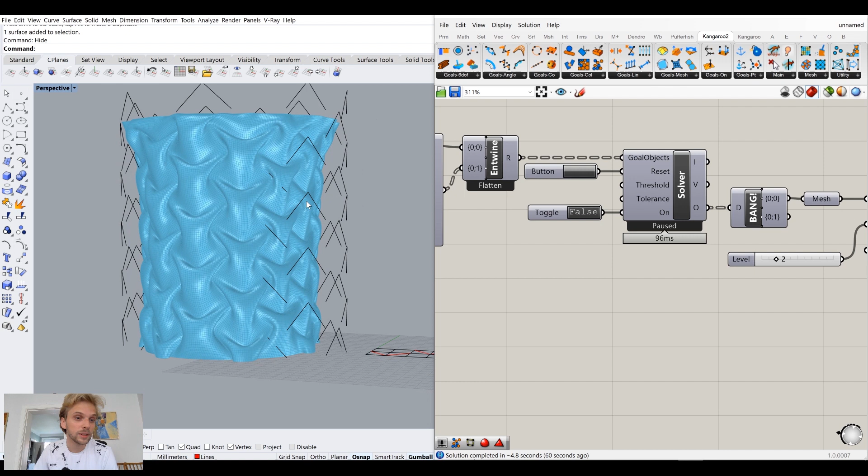So, hope everyone enjoyed this one. I sure have. It's always nice to work with these patterns and investigate what kind of effect you can get. And again, using this stitching fabric, you have a flat piece of fabric and you just stitch it together and use these smocking methods to create a formwork for concrete. I think this is brilliant. It introduces so much nice complexity with not a lot of costs, right? And again, Annie and her research is definitely something that you should check out.